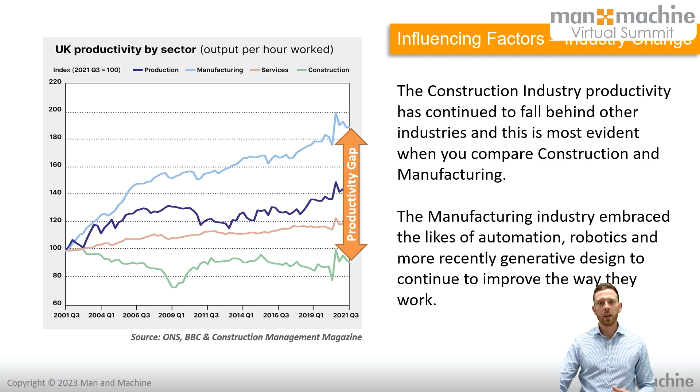And that's really interesting when we take a look at all of the industry pressures currently. If we start to take a look at what's going on in the world, the introduction of AI, artificial intelligence - that's been in the news an awful lot over the last few weeks, for good and for bad reasons.

I think ultimately I've always seen it as a bit of a gimmick. AI, when it first came out, I thought, okay, how are we ever going to be able to use this meaningfully and effectively within our workflow? I've obviously been proven wrong, and it's certainly becoming more and more prevalent. But again, that will come back down to manufacturers providing the information, and then the construction disciplines within the construction workflow being able to actually use and manipulate that data.

You've also got a few other things in terms of off-site fabrication, off-site manufacturing - again, it's been in the news for a lot of reasons. Traditionally, home builders have really struggled in terms of being able to produce and guarantee that quality of builds. You don't have to go too far online to find some real horror stories, things that just shouldn't really happen.

For one reason or another they do, and ultimately the construction industry, specifically home builders, are looking to digitise their workflow and look at new ways of delivering their projects. Off-site fabrication or manufacturing offers that.

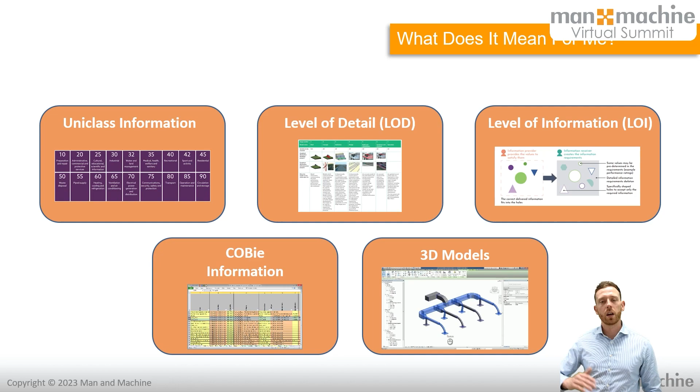So yes, I appreciate that in the conversations I have more frequently, someone says 'oh, BIM's just Revit' - it's not, it's more than that. It's about the information and it's about the process. There are two elements: clearly I'm talking about the process this afternoon, and then we'll come on to the workflow point of view from there.

So just a final point from me, last slide before I hand over to Robin. There's two kinds of camps when you look at BIM for manufacturing. You have your product-based workflows, where you have doors, windows, chairs, office furniture - anything like that - where you're manufacturing a product and trying to get it specified on a job, or trying to get it sold to your client.

You then have your design-based workflows. Now these are specialist portions that you undertake for the client or the contractor. They will ask you to produce 3D drawings, or produce a system, or produce your products within that actual space. We start to see that with shutter doors, with HVAC systems. There's many areas you can go down.

But the one bit of advice I'll give to anyone starting this or looking at this is: realize which area you're in, and look at this from a very holistic point of view across the organization. In terms of what BIM means for you, it's always good to set up and understand what you're actually requiring. BIM isn't just for design teams - BIM moves into commercial teams. They need to know ultimately what your clients want, agree to it, and be able to deliver it.

There isn't anything more stressful than someone from the commercial team or sales team signing up for a project, getting a client on, agreeing that they can deliver something that we know you just can't do, and they've just said 'yeah, we can do that, that's absolutely fine.' Let's have a sensible conversation - more often than not, when you get to the crux of things with that client, they're actually looking for something much more simplistic themselves, or they're just not very well educated. So there's an opportunity for you to work with them and drive some meaningful change from there.

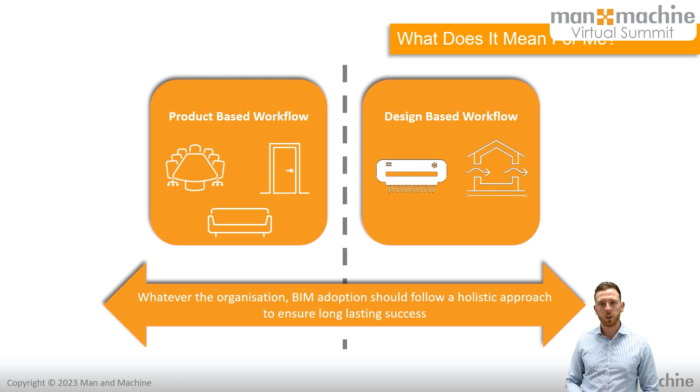So I'm here to show you some technology around Inventor and Revit interoperability. And what that means is essentially looking at the two life cycles, or the two types of workflow, that Nathan's just discussed.

We've got those of you that just need to get a 3D model out there. You model a piece of furniture, or almost an off-the-shelf product, that you need to provide in a format friendly for digital construction, whether that's Revit or another application. We have a workflow that suits product manufacturers from Inventor, and it works really well in 2024.

The other end of the spectrum is those of you getting more involved in project work. Again, we have fantastic workflows between Revit and Inventor, which leverage things like the Autodesk Construction Cloud to make your collaboration and modeling efforts as a manufacturer, as well as the collaboration of that design into the construction space, so much easier than before.

And I'm just excited to share those for you for the next 20 minutes or so. The technology just continues to surprise me, really. The stuff I'm showing you today isn't too dissimilar to things we've shown before on these kind of sessions.

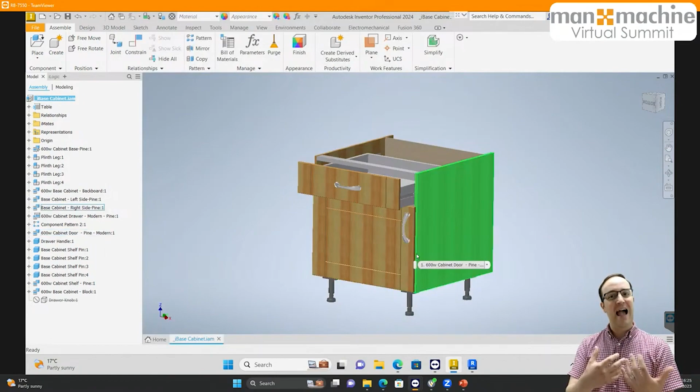And once we've got that, we then want to think about the way that this looks. Now, we can simplify that using the simplification tool. Cameron showed this fantastically earlier, so I'm not going to go to the nth degree of showing all of the different options in here. But this has been tweaked and adjusted over the years by Autodesk to really suit the product design for construction workflow.

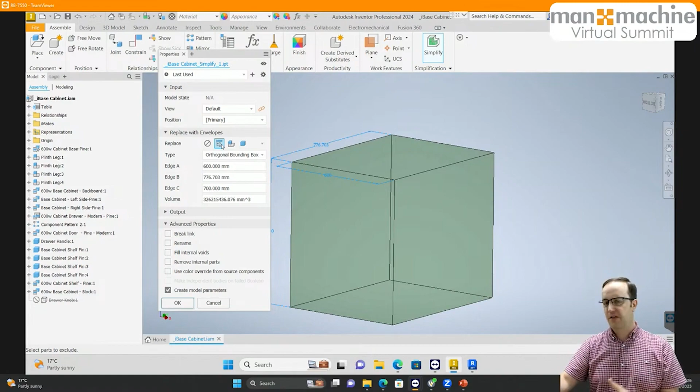We can very quickly come in here and say, well, I just want to replace that whole thing with an envelope that's got a nominal width and a nominal depth. If this is a conceptual part of the project or early design stage, that might be enough for what the designer needs to put this into Revit and do some space planning.

We can then take that a little further, where we take the individual components and compartmentize them, turn them into envelopes. So I've got a bit more of an idea about what this thing's going to look like and the space needed to pull the drawer out or open the cabinet or whatever it might be. But again, it's very simple. It will simplify the shapes.

The last thing we want is all of the fabrication information from a surface perspective, like threads, curved handles, and stuff like that inside of Revit, because we just don't want that level of information.

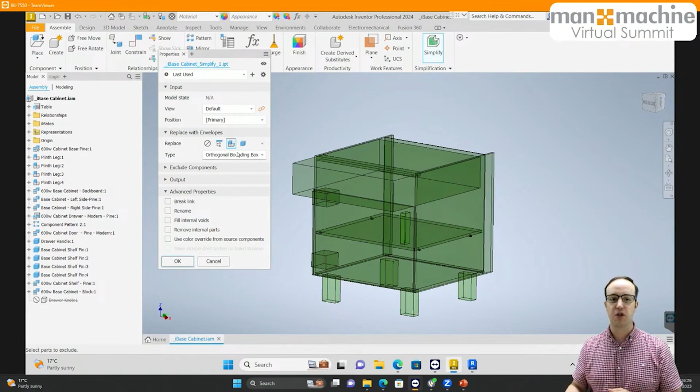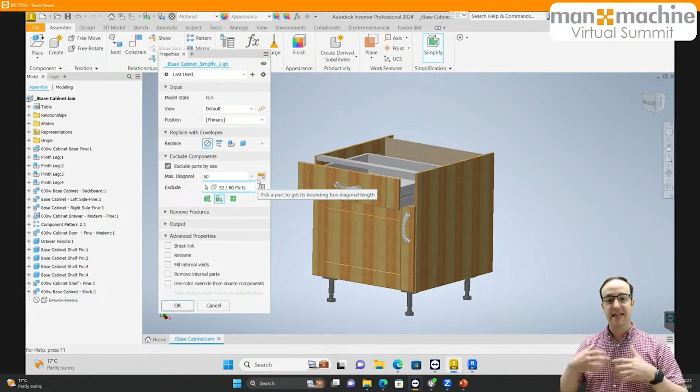For the purpose of this, I'm going to be naughty and push that level of information across because I can. But I'm going to run some of the exclude components. So I can exclude parts by size, and start saying that if there's anything less than 100 or less than 50 or whatever it might be, I can tell Inventor to get rid of those parts.

As well as that, I can say I want to get rid of all holes, fillets, chamfers, internal pockets, embosses, and anything else that from a manufacturing perspective is useful, but when it comes to exporting this to Revit or the Industry Foundation Class IFC format, it's not going to be happy if you've got 2, 3, 4, 10, 20, 30, 50, 100 of these in the model. It's going to start to struggle.

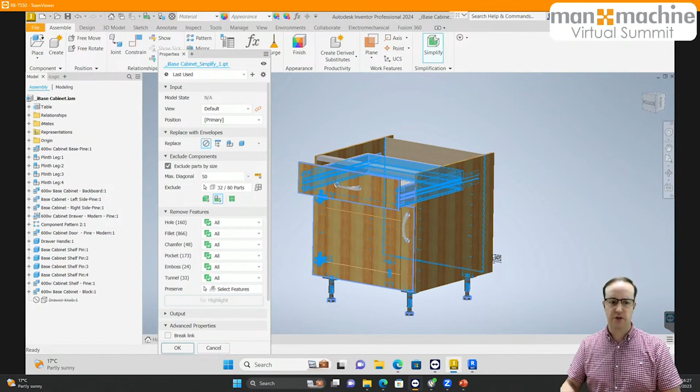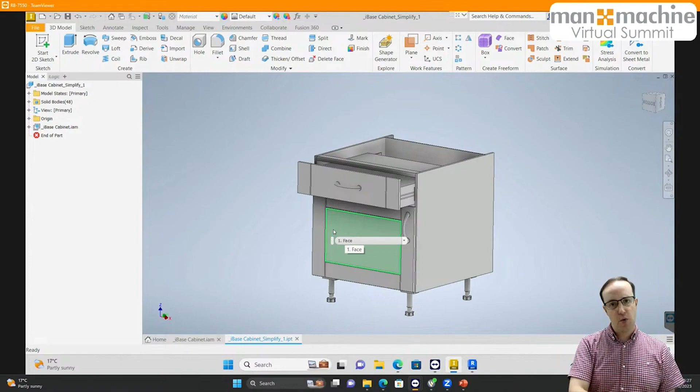So I can simplify these and press OK. This will create a new part file, which will be a representation stored against my representations in Inventor. If you're using a slightly older version of Inventor, that will be in your level of detail. If you're using a newer version, that will be within your representations on the left. As you can see, my output here is a component that's far simpler, without holes and things like that.

Now from here, I'm going to go in and just export that out. Let's go to my environments, let's go to export my BIM content. So from the environments tab, we can click export BIM content.

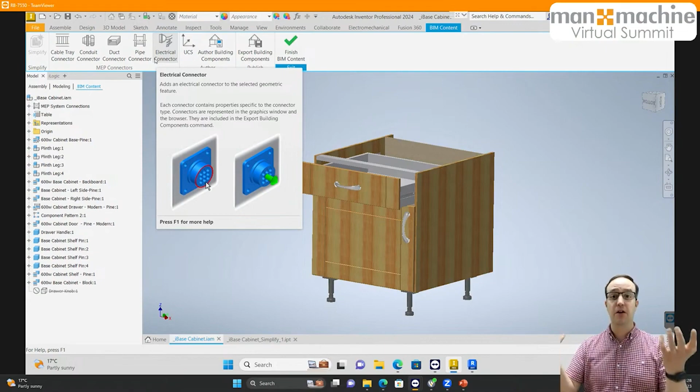We have a load of options at the top here with regards to connectors. So if you're in the HVAC industry or the electrical industry, we can add data connections, power connections, air connections for inlets and outlets, duct connections, and so on. It's as simple as specifying a piece of geometry, the direction of flow, and the type of connection you need. That will come across inside of Revit and do what it is that you need it to do, which is great. We're not doing any of that.

So all we need to do is tell Revit how to work with this file. We're going to go to Author Building Components. I'm going to use the model origin with regards to the orientation of this part.

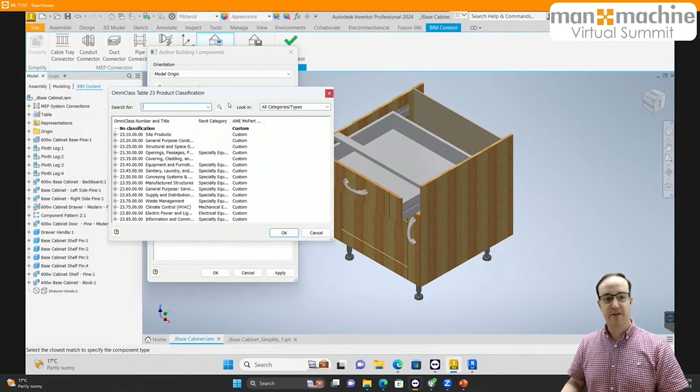And we need to classify it. Now, this is quite American, which is a bit of a shame from my perspective. Hopefully there's someone from Autodesk listening that can understand we would really benefit from a uniclass table here, not an omniclass one. Been saying that for a few years, but nonetheless, this allows us to classify inside of Revit. Forget the fact that there's an omniclass number there, we don't use omniclass in the UK. This is allowing us to tell Revit what component this is going to be.

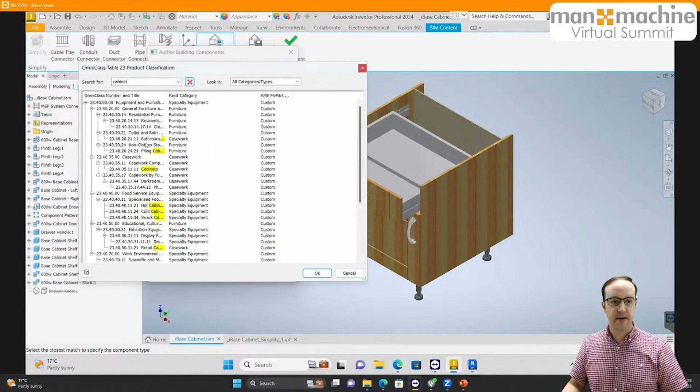So I'm just going to do a search for cabinet. It will search across here, and I can go find casework cabinets here. Great, press OK. Then we have information - this is our level of detail, and here is our level of information. I can choose to enable model properties in here to include things like the uniclass code, the description, and the COBie warranty information that I added earlier. Press apply, press OK.

And again, we can customize and tweak that, and you could even go as far as going into the back end of the system and editing some XML files and other configuration files to build that automation out even more. If that's interesting, reach out and we'll tell you how. After you've authored the building components, we simply choose export.

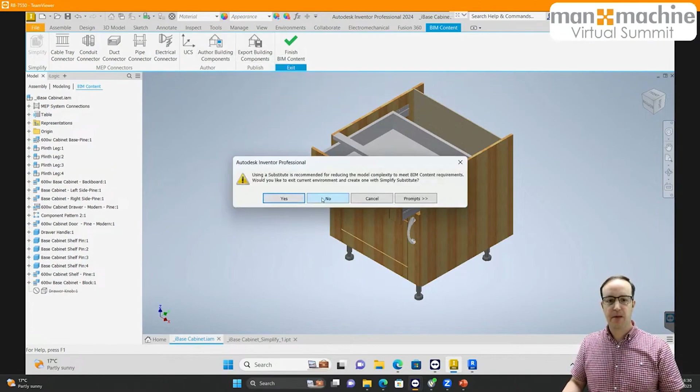From that perspective, I'm just going to use the full component here just for ease of use more than anything else. And I'm going to go ahead and save this on my desktop.

We've got three options with regards to files. Now, don't pick the wrong one, is what I will say here as a user of both Inventor and Revit for the past 20 years or so. Don't pick the wrong one.

When you're exporting a product like this, you want to use either a Revit family, an RFA file, or an ADSK exchange file. Don't use an IFC. An IFC, an Industry Foundation Class, is there from a Revit perspective as part of a bigger aspect of the building. So if you were doing an entire MEP design or structural design, or some very specific cabinetry or carpentry design that's much part of a bigger thing like a facade, then use an IFC—not for one individual component, because it will not work the way that you would expect it to or want it to as a manufacturer inside of Revit.

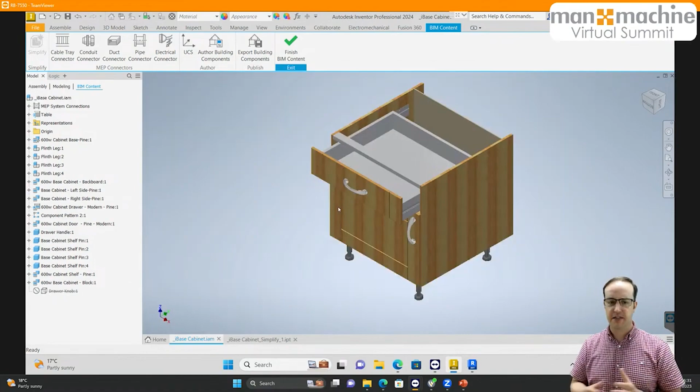So we'll pick the RFA and hit save. Again, I'm going to get a couple of warnings just because I'm being a little bit off the cuff here, but I'll say yes, and this will sit here and export the file.

It's a fairly simple design, so it shouldn't take too long. I'm running on a fairly high spec machine, and this will go away and export that out to my desktop. We can then show you how we can very easily place that inside of Revit, and that's our first workflow done. So that's our product.

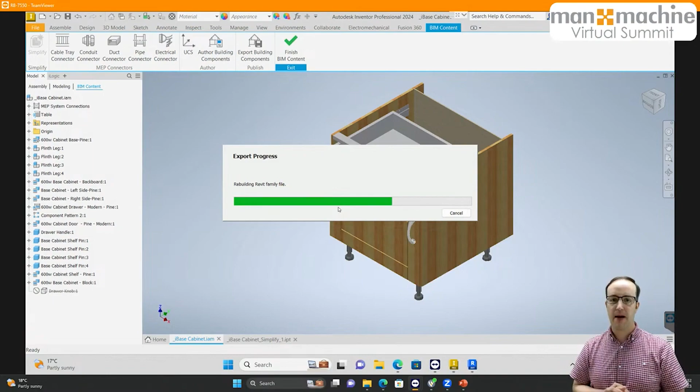How do we take something in Inventor, get it to the right level of detail, get it to the right level of information, and then push it out to a format that's usable in the construction space. And naturally, we're going to use the Revit format because we're Autodesk.

So if I just head over to Revit, I'm going to start a completely bog standard Revit project, an RVT. Revit has two types of file. A family is a component, like a piece of furniture or a TV screen. An RVT is a project—it's a building or a much bigger part of the building.

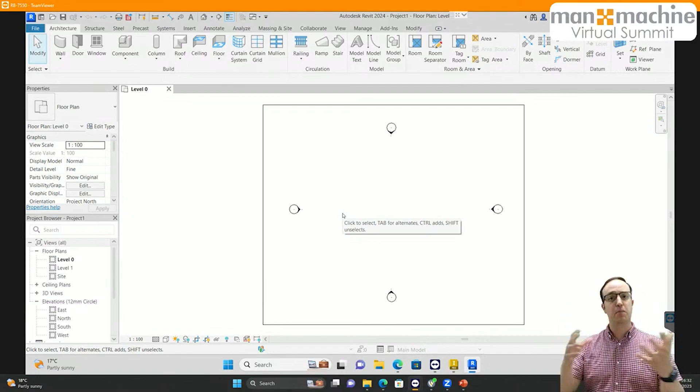All we're going to do is go to component inside of Revit. I'm going to load in a family from the desktop. I should be able to find my _Base Cabinet here. Choose open. Give it a couple of seconds and you can see that cabinet there on my mouse. If I place that on level 0, let's just rotate it around by 90 degrees and place a second one. You can see it works like any other Revit component would.

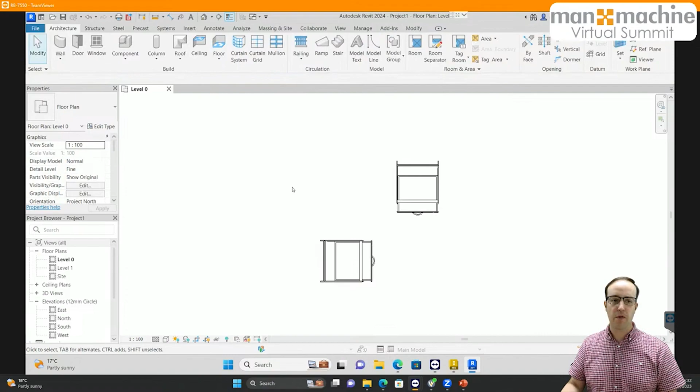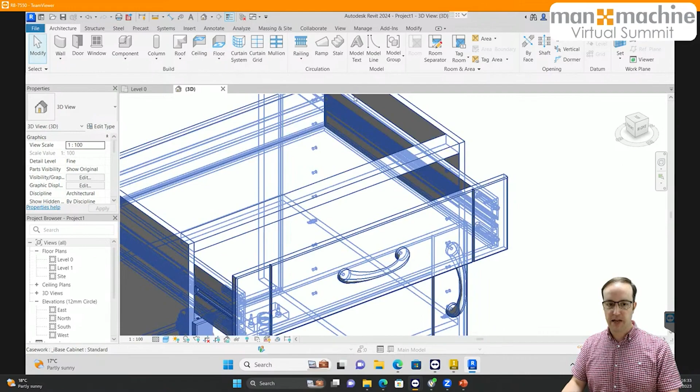Let's go across into 3D and zoom in. Yes, I've exported it in all of its glory. I decided not to use the simplistic model that I created, just to save myself a little bit of time with saving, exporting and configuration as we are live and on time limits this afternoon. But as you can see, it comes across really well. Even this one that has all of the bells and whistles, holes and fixings, it comes across really nicely. You just wouldn't want that level of detail X amount of times in the model.

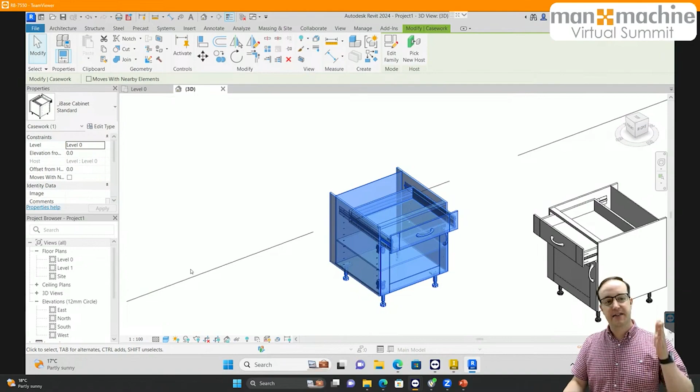If I select one of those components and go to its type properties, a type is all instances of that component, an instance is that one instance. If we go and look at its type properties and scroll down to model properties, we have all those properties that have come across from Inventor, including the uniclass code, the uniclass description, and the COBie warranty duration.

There's some things you might need to do to rejiggle those inside of Revit as a Revit user, which we can do with Dynamo. It's basically changing the property sets that they sit within. But generally speaking, it works well, right?

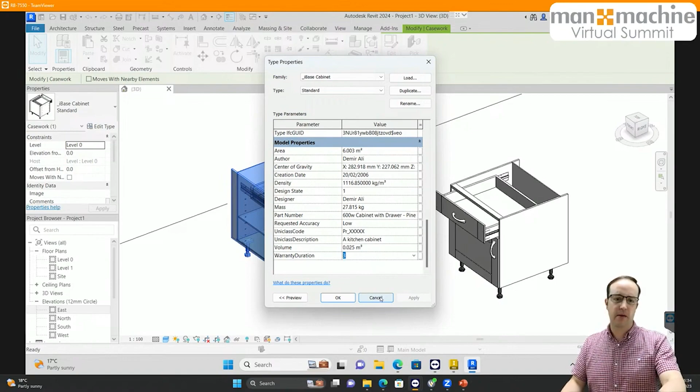Maybe it's just me, but from my perspective as a bit of a geek, I've got a fabrication design. I can send that detail to the level that we want with the information that we want. I chose all of it, and we push that straight through to Revit, and it works well.

Fantastic, great. But what if you need to do more? What if you're on the other side of the workflow and actively involved in construction projects? You need to get involved in more than just providing a single design for someone to place in their model. What if we're designing a shop floor fit out, or a whole load of carpentry, or maybe a bespoke kitchen design and you want to model that around the space you've got. Inventor and Revit communicate with each other and allow you to work on that premise.

I hope I'm not overrunning, because I'm just going to keep talking because, 5 minutes, is that all I've got? I'm going to overrun, but I think we'll be okay.

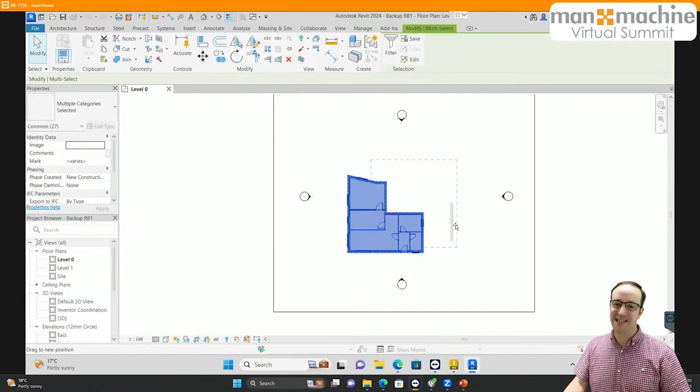So this is the second part of the workflow. I've got a very simple model here that I threw together yesterday inside of Revit. We're going to imagine that this part of the building is a kitchen, and I'm going to place some componentry together inside of Inventor to suit that space.

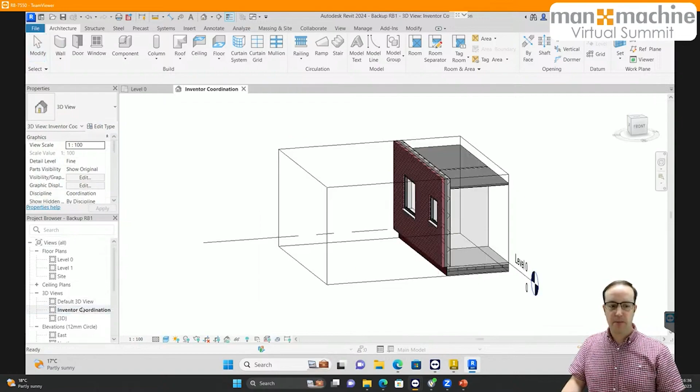Because we're a little bit limited on time, what I'm going to do is reuse some files that I created yesterday just to save the process. But we're imagining that I have a design, or the need, to manufacture a design for that very specific space. So in Revit, I'm going to create a view that is customized, apart from it's not, which is customized to suit that space.

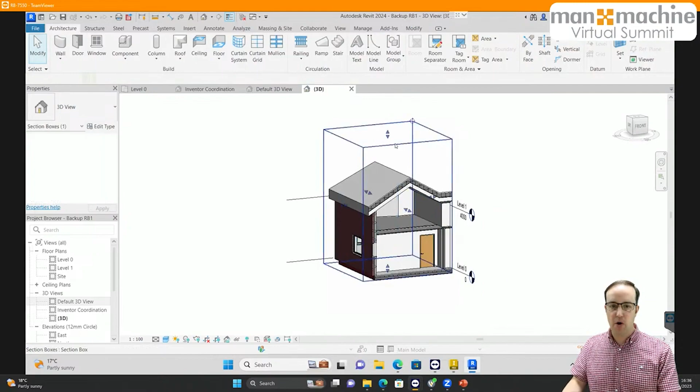In other words, I'm going to select maybe some components. With those components selected, maybe I'll use the section box, and I will create a view that only shows the information I want it to show in that view, which is the kitchen space. I save that as a very specific view inside of Revit. I'm just going to close some of these down here.

Now, I'm using the Autodesk Construction Cloud for this model. On this particular design, what I've done is uploaded it as a cloud model to Autodesk Docs, the common data environment in the Autodesk world. It comes within the Autodesk Architecture, Engineering and Construction collection. What I've done is uploaded from Revit that particular file. You might imagine from a collaboration perspective, you're shared a Revit file to collaborate or coordinate with in the manufacturing space. This is that file.

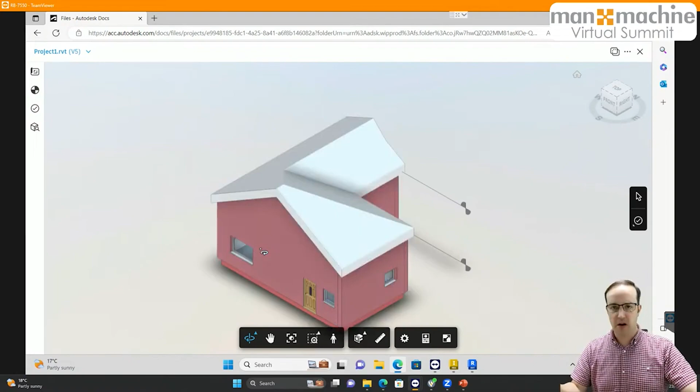What I can do within that file in the Construction Cloud is view it. As the administrator on this account, or maybe the architect or principal designer, I can come in and look at a given view inside of the Construction Cloud, and I can say I want to create a data exchange file using that particular view. Two buttons, one, two. What that will do is create a very small size file that contains the information we need to read into Inventor.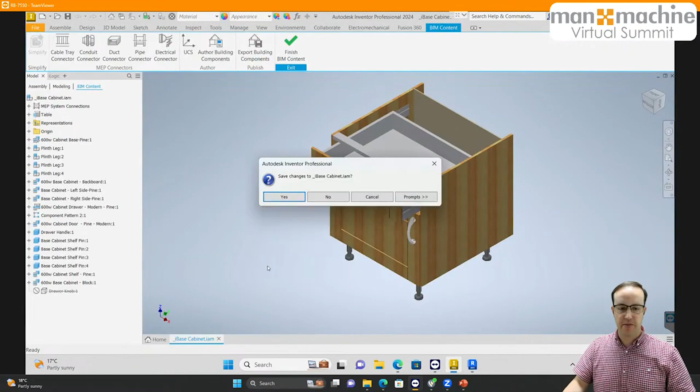That essentially means that if I get rid of these models that I had open earlier, I can go to the Collaborate tab in Inventor and choose Data Exchange. This will log into my Construction Cloud, so you'll need to have access to that project where they're stored as a manufacturer. But I'm now in Inventor interrogating the common data environment Autodesk Docs to see what information is available to me.

Now I'm going to pre-apologize, I did a few of these yesterday, so there's a lot of files because I had some issues with my internet at home yesterday. So what I'm going to do is come in and just choose this one here. Ordinarily you would only have one, not several.

I can grab it and say preview to have a look what's in there if I want to. From that preview I could explode it, I could interrogate it, and I can get all sorts of additional information should I want to as a manufacturer before I say, hey, yeah, I want to use this in Inventor.

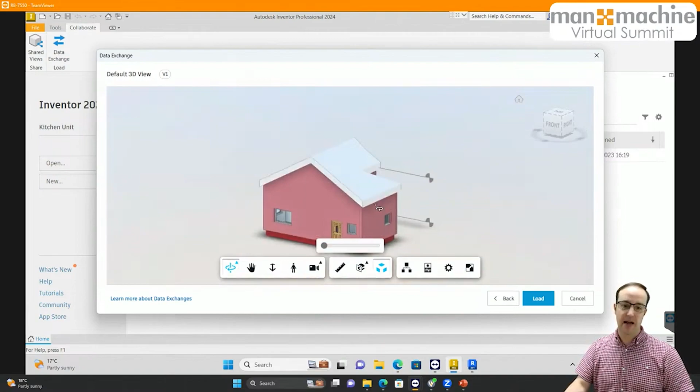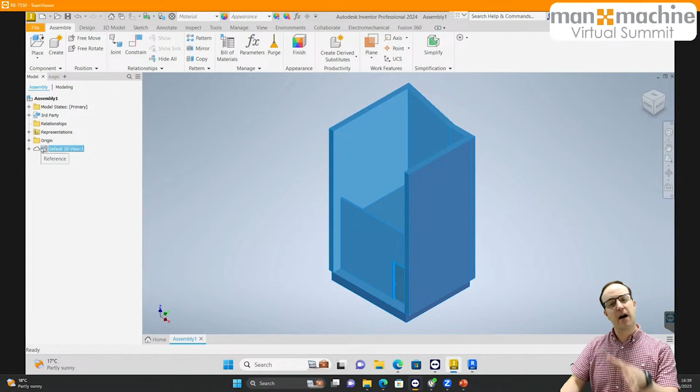I'm going to press load. What this will do is load that information straight in as a link, so it keeps a live reference in Inventor. Here's the view I created just now inside Revit, and here it is as a cloud-linked model through Inventor. That's a live link. If they update that on the CDE, Autodesk Docs, it will update inside Inventor if you tell it to with the right click. As you can see, it understands all the ceilings, doors, windows, and all the information about that Revit file.

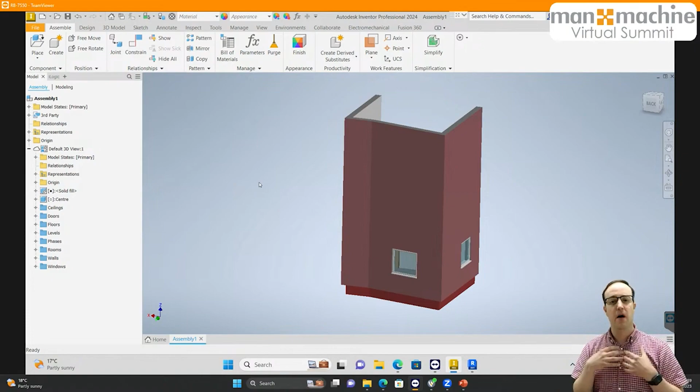So this is the Revit file in Inventor, or the portion of it I need for my coordination. It's worth pointing out that whilst I'm using the Construction Cloud workflow, you can also do this just with the native Revit model, inserting it natively without the need for Construction Cloud if you would prefer.

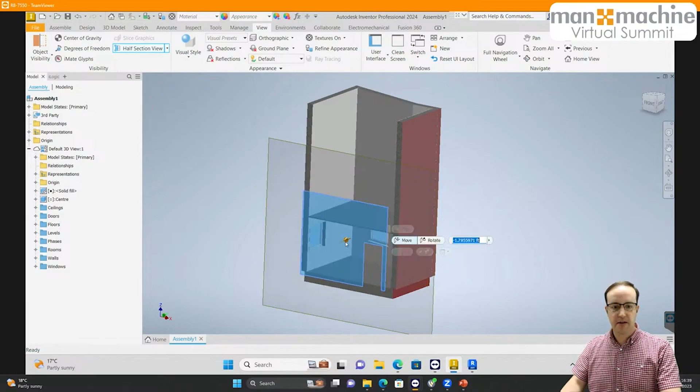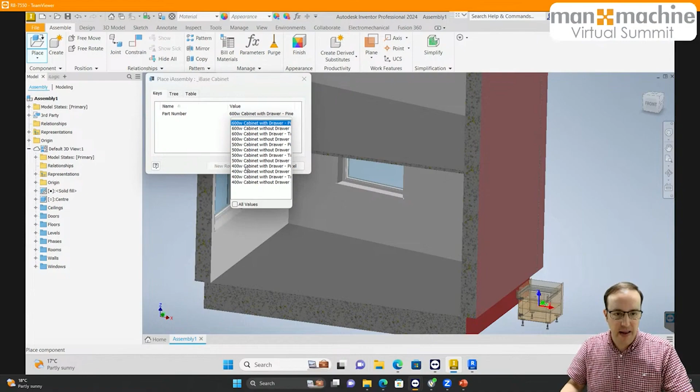So from here, it's Inventor geometry, and I can start putting section views on here. Let's grab this one and move it in just to get rid of that wall. And then let's come in and place a couple of cabinets, just because it adds something to the workflow. So let's go to assemble, let's place in that iBase cabinet. It's an iPart that we've got here, so I'm going to place a standard 600 unit, and let's also place in a standard 400 unit.

Once they're in, again, this is just an Inventor model. So whilst I've got a big old building there that's referenced, it's just Inventor. It'd be nice if the colours were the same—hey ho, you'll have to let me off.

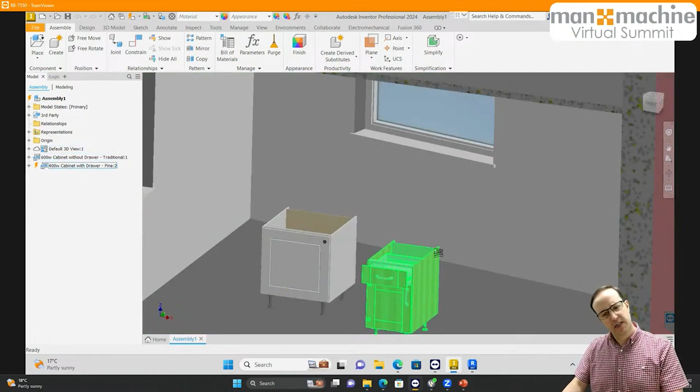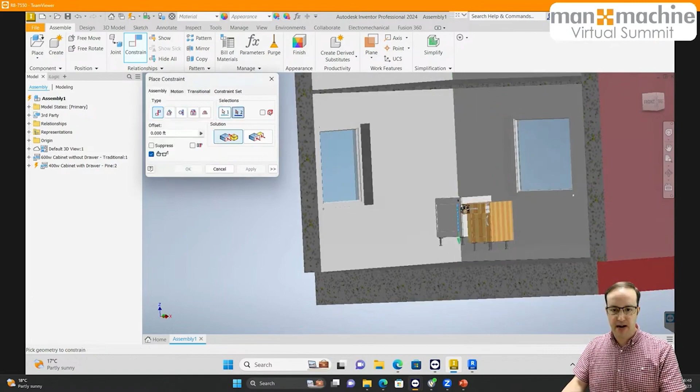I'm just going to put a couple of constraints on really quickly. So we'll use the back wall here that's at an angle, and we'll constrain this to the back of one of these cabinets. Let's select other and grab the back face there and constrain that to the back wall. Perfect, let's apply. Let's drag that up and say we want a mate between—I should have put a section box on here rather than a single section plane, serves me right. Let's grab the bottom foot there and mate it to the floor, and let's grab the wall and mate that one to the back side of this cabinet—which is not that one, it's that one.

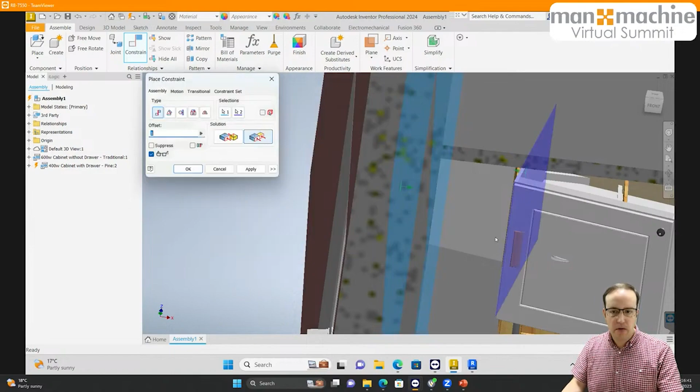And then we're going to go with an offset. Oh, feet and inches, terrible. Let's go with a 1 foot offset. Press OK. Was I on flush? What have I done there? Well, it should be from there to there. Mate, offset, 1 foot, should work. Why don't you work? We'll go with it—so you imagine there is an offset there as well.

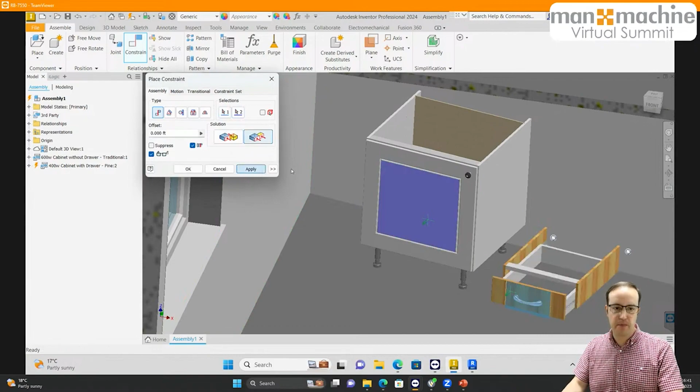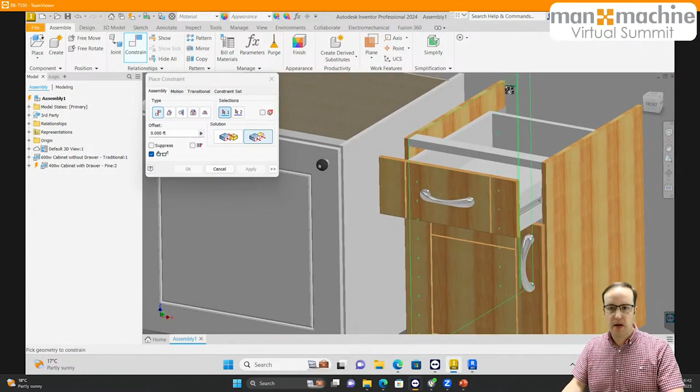Then we're going to place another constraint on here, and say we want to flush the front with the front. Flush the top of this cabinet with the top of this cabinet as a flush, please, thank you very much. And then what did we do? We've done the front with the front—I've done the front with the wrong front, never mind. And we're on there, mate them together. Mate the side to the cabinet there and the side of the cabinet there. Great, so there we've got our components inside of Inventor.

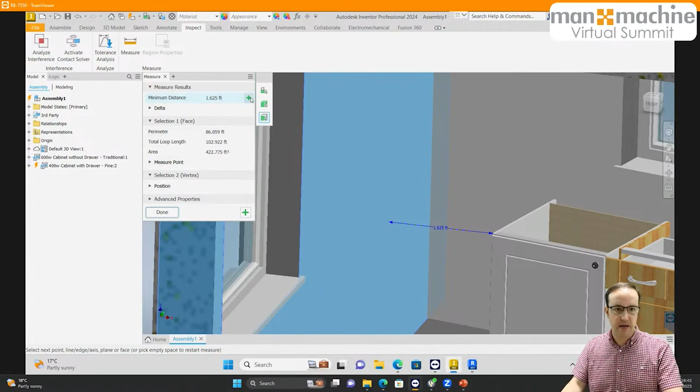If we go to inspect and measure from the side of the wall there to the front corner just here, we've got 1 feet and inches again, apologies—we've got 1.6 foot. If we come in and look at the distance there, I'm just going to copy that because my memory is terrible. We have that saved.

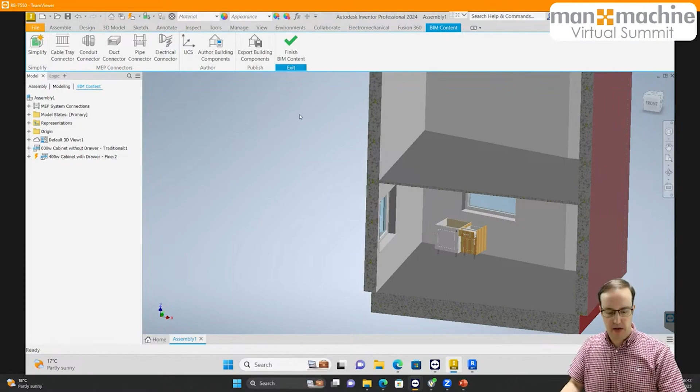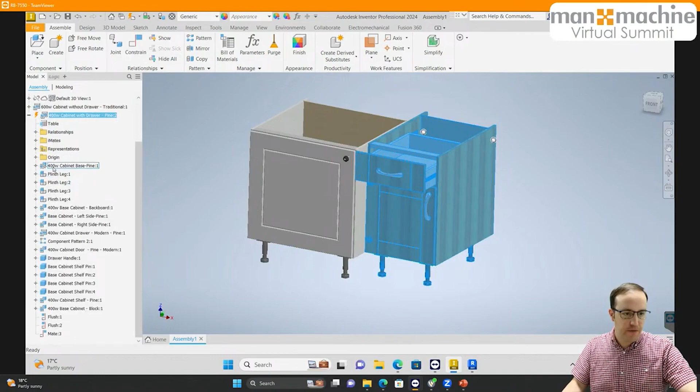What I'm going to do is be quite lazy. So I'm going to go to environments, I'm going to go to export BIM content. It helps if I remove the face of the building first. I'm going to suppress this link and hide it for the purpose of this, because we don't need that on. And then we're just going to export our design, imagining that I've got something far more tremendous than what I've got here. I am going to change that flush there because it's going to annoy me.

Let's edit and change that. Thank you. And then we're going to export this out to Revit.

If we go in here and export, we only get RFA, IFC, or ADSK. You could go out to IFC if you wanted to, but I don't need to because I've got native Revit and want to produce native Revit, so we don't need to go out to export building components. What we can do is go to File, Export, and choose RVT, which allows us to export a Revit project directly from the assembly, should we want to. That came in with Revit in Inventor 2023. Both options actually work really well.

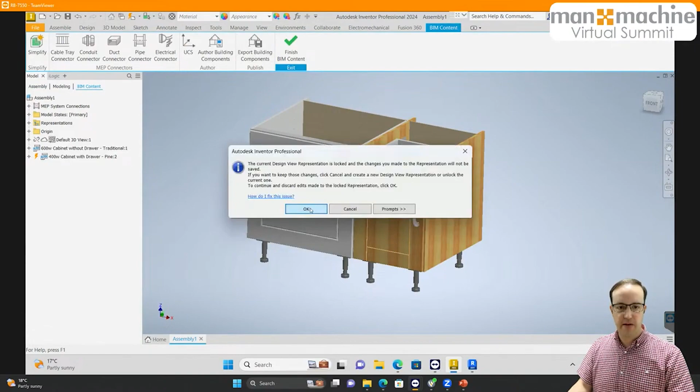Actually, why not? Let's use an IFC instead, something that isn't native Revit, which is probably going to show this off better. So let's save that assembly away. It doesn't matter what format you use essentially—this is going to allow us to export that entire building, and we can save that to our desktop.

Now, with the bigger workflow, I am overrunning—apologies, Simon and Nathan. But with the bigger workflow, what you would do is take this and push it up to Autodesk Docs to allow them to coordinate with it as part of the wider workflow. I'm just going to be lazy and use standard Revit to bring it back in, just for the purposes of time.

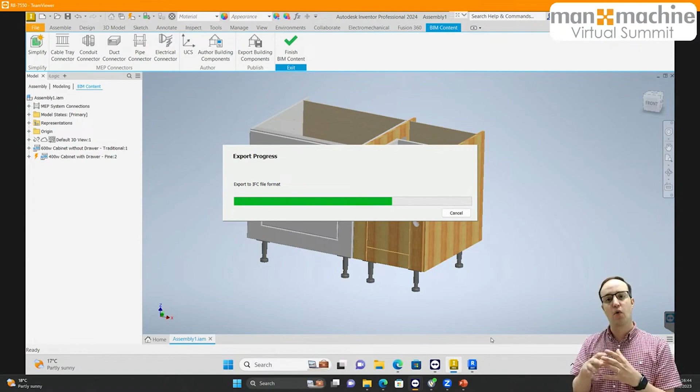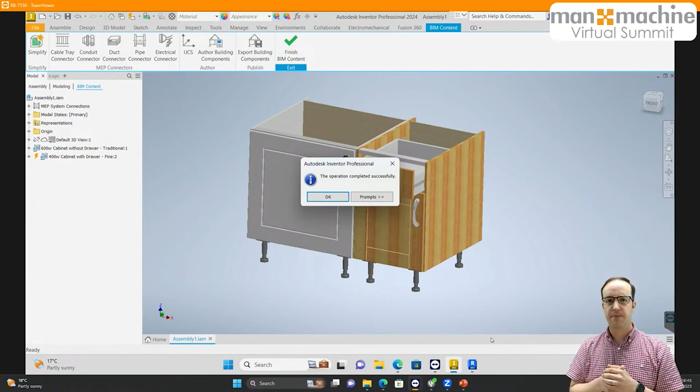Because what I've done is I've got a Revit building, and that Revit building is around some northings and eastings and an angle to true north, and it has coordinates. Inventor doesn't work off those real world coordinates—Inventor just works off 0,0. But the key is when I bring in the Revit model, I'm constraining that to my origin in Inventor. So Inventor's 0,0 is either the project base point or the survey point or whatever you're using inside of Revit. Meaning if you're then collaborating and coordinating around that building from an Inventor perspective, it's actually doing that in the right location inside of Revit.

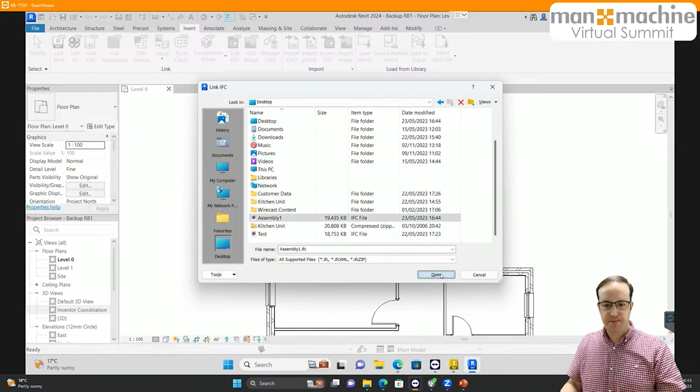So if I go here and either link the Revit file, or in this case, because I've been quite brave and chosen to link an IFC, when we open that up, with a bit of luck it will link in that IFC file, reading the IFC that Inventor has produced. Again, you could do a native RVT if you're being asked to produce Revit content natively. I didn't simplify the components, which won't please the IFC.

Typically, there we go, it's in the wrong place. The joy of live demos, but I came prepared. Let's get rid of that one. Unload and reload. The joy of live demos, but hey ho, you'll have to let me off—it's late in the day. Let's reload. Come on, reload. Reload from the desktop. Test. Open.

And when that comes across into Revit... it's not worked? Brilliant. I'm going to try one more time.

Manage links. Manage links. And... reload. Okay.

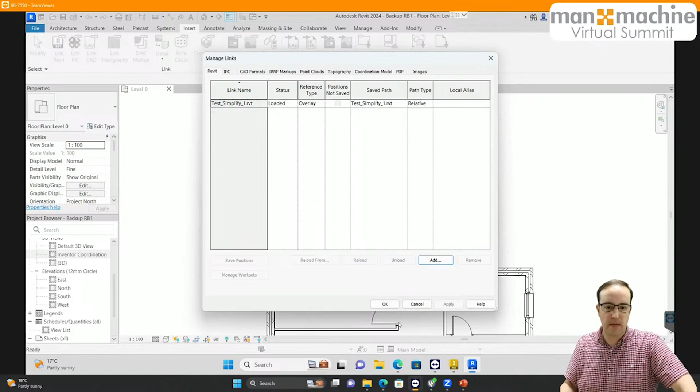Great, the best part of the demo, and it didn't work properly. But what I'm going to do is, before this goes up on YouTube, I'm going to do that again because that's just going to frustrate me, and I'm going to sit here and wonder why that hasn't worked, because it's meant to come across in the same place, which I know why.

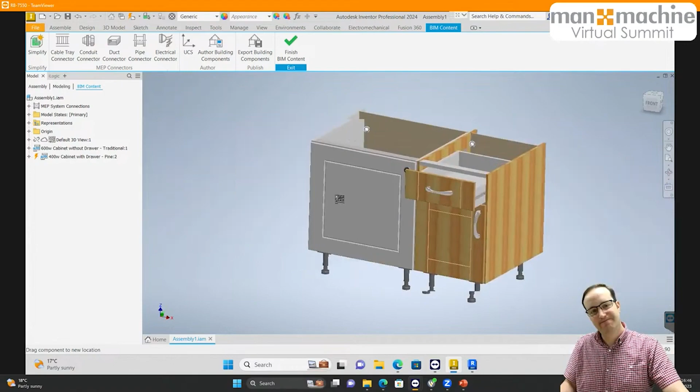They're not constrained, are they? Yeah, that's never going to work. Okay, so make sure you constrain them. Don't leave them floating because that won't work—then they'll be constrained around the building. But what you get is the ability to link those back in.

So in summary, we can take a product in Inventor and export it to either the same, or more realistically, a simplified level of detail. We can then take that and produce a Revit file natively. Or we can build a bigger project, modeling that in place with the coordination tools—not like I've just done it—and with that model in place, we can model it around the building, use the constraint tools in Inventor, and then create a file that can be linked and controlled back into Revit in the way you would want as part of a project.

Thank you very much, Rob. That was a great session. It was really good to look at in terms of that connectivity between the native authoring tool and taking it into the Revit file or the Revit format that can be delivered to the client.